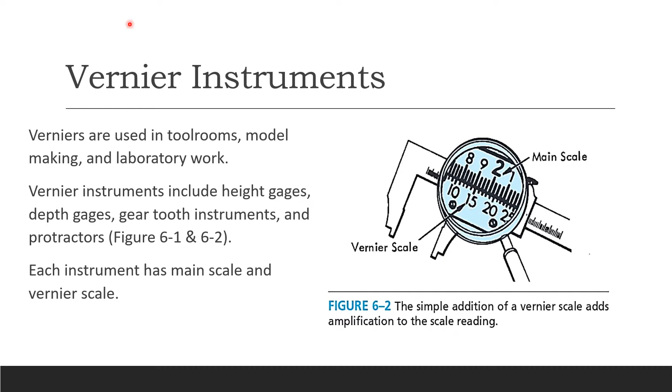With vernier, you can read to 3 decimals. First, you're going to round off the reading, so select your nearest inch. Then select 0.1, that's your first decimal. Then we're going to read the second, about half, so right here. Then we're going to read the third decimal. So in this case it's 2.115.

It's pretty difficult to see, so take your time and be patient to be able to see these graduations, or discrimination.

When you look here, this is your main scale, and this one is your vernier scale. You're going to go from 0 all the way to 25. In this case, you read from left all the way to right. For this one, it's a little bit different because this direction goes from the right all the way to left. So just make sure where your zeros are on your vernier scale.

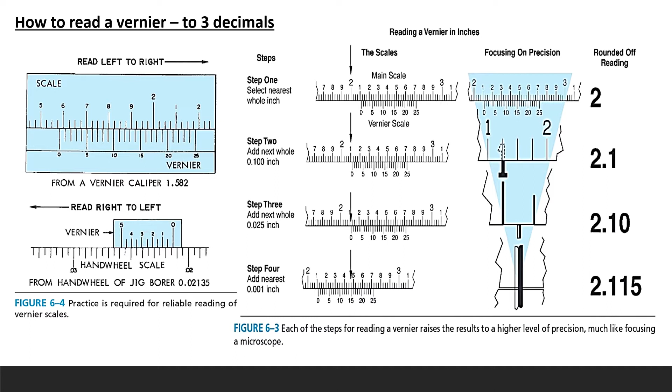You have two scales, the big one and the little one. For vernier instruments, nearly all of them are available with metric scales, but in America we use decimal inch as well. Not all of them, just nearly all of them are in metric scales.

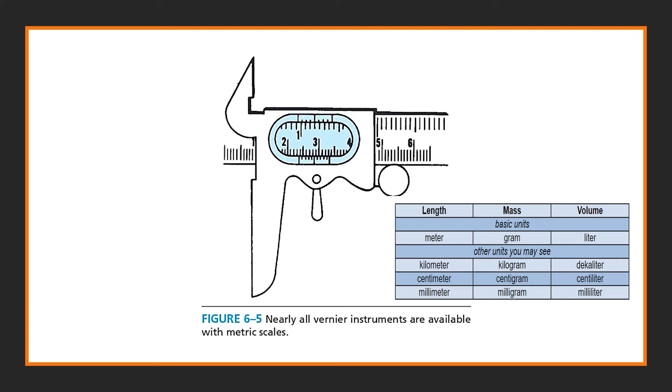For vernier, if you have like 50 divisions, then it's easier to use than a 25 division vernier. And here are the advantages and disadvantages of vernier scales.

They're pretty easy, you can read through it. Amplification is achieved because of your design, and design is so important for vernier, because if you didn't build your instrument in the right way, it's not going to give you a reliable measurement. You don't need interpolation, meaning you don't have to calculate by hand, all you have to do is just read it. And there's no theoretical limit to the scale range at all.

And the zero setting adjustment is pretty easy. All you have to do is close your vernier and then set it at 0 to calibrate.

Disadvantages: accuracy lies in the instrument on which verniers are used, the way you use it. And the reliability of reading depends more on the observer than most instruments. So again, the way you use it, the way you read it, the discrimination is limited, and that is also a disadvantage. And there's no way to adjust for any errors other than 0 settings.

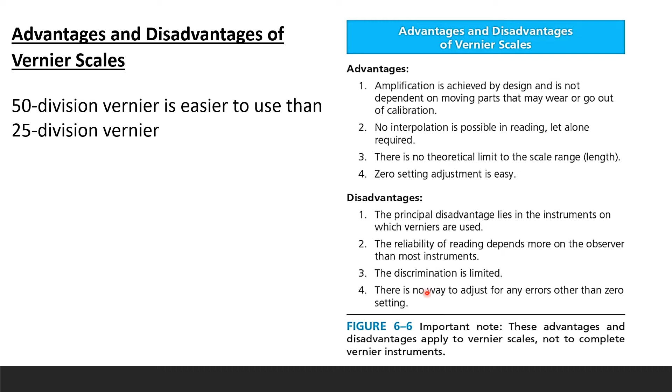So vernier is kind of like a trim that you put onto an instrument. If you put the vernier on a caliper, you get the vernier caliper, and that's a slide caliper with trimming. When you look at it here, this is your beam, you gotta read it very carefully. These are just showing you the functional features, and that's your metrological features.

When you take a look at it, you're going to see the vernier scale plate, and inside of that is your vernier scale. Here are your jaws, you can do outside and inside measurement, because when you look at the shape, you'll see on each jaw a little edge, at 90 degrees.

So that's where you put it to do your inside measurement. You can line these edges onto the rim of whatever you're measuring. This is your fixed jaw, and that one is adjustable because you can roll it in and out.

On this side is your metrological features. Here, your reference point is your fixed jaw, therefore it is your reference point. This is your measure point because you can adjust it in and out. This one is your axis of instrument, where you use it to align your part. Alignment is so important for vernier.

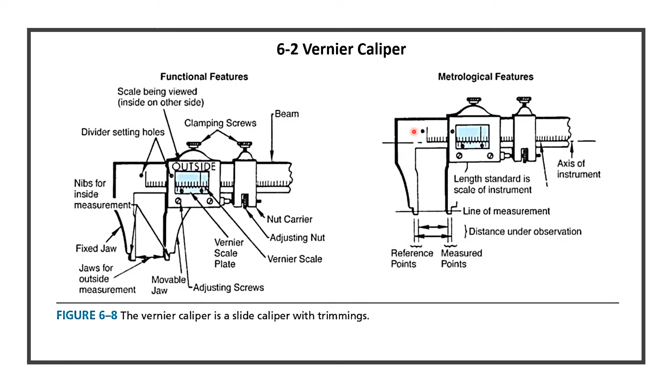So if you remember, there are two measurement methods: interchange and displacement. For verniers, the method is displacement. Every measurement you're doing has three elements: one is your part, the other is your measuring device, and then your standard.

For vernier, step one, you're going to observe one end, so that this is closed position. Therefore we're setting the 0.

Vernier itself is your instrument and also the standard. The part we're going to put in, so here that's your part. You're going to observe the second end of the part simultaneously with observation of the standard. So here's how you measure the part using a vernier caliper.

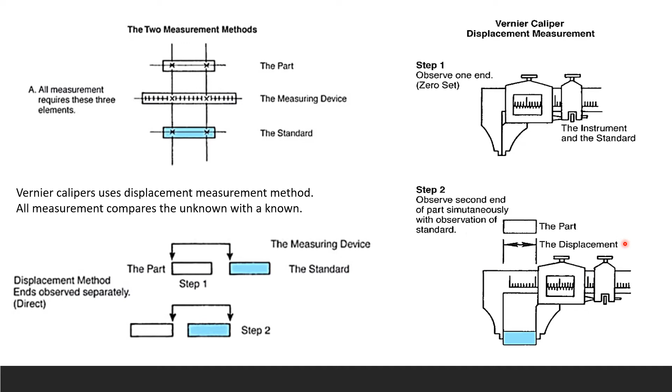Vernier calipers don't follow Abbe's law. Abbe's law tells you that you get maximum accuracy when your standard is in line with the axis of the part being measured. When the standard is in line with the axis of the part being measured, you get maximum accuracy, but this one doesn't follow it.

So when you look here, there's a position error right there, because this position X is not in line. Here this is your line of measurement, so we have position Y, and there's error in measurement when Y is not 0.

When Y is 0, Y is definitely 0, when X is 0 or H is 0, but this condition can never happen. Even if you go all the way to the end, to the fixed jaw, it looks closed, but that's not 0. So H can never become 0, therefore this condition cannot happen. X can never be 0, and neither can H.

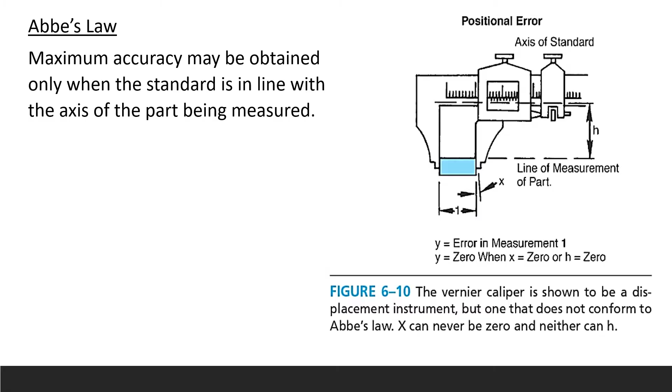So here are the steps for using the vernier caliper. I'm not going to read that for you, you can go ahead and read it yourself. It's all about calibration, cleaning, maintaining, and how to use it step by step.

We're already doing that. The only thing we didn't do is calibration and cleaning, because I just came into this school about 3 weeks ago, so I haven't actually looked into the instrument yet. But I think we definitely need some cleaning on our instruments.

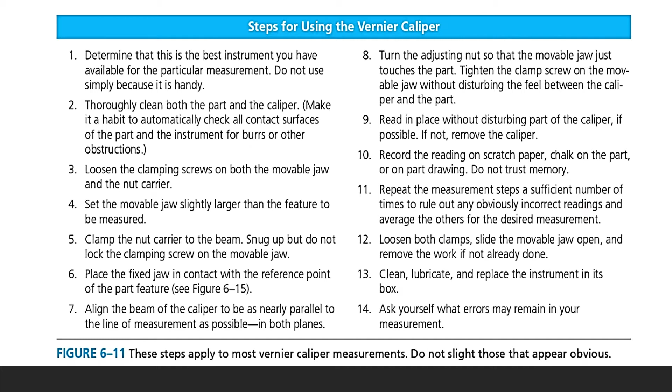So when you use your vernier caliper, you have to be so careful to check your alignment between the caliper and the part you're measuring. Otherwise, you won't get an accurate measurement at all, because geometry is vital to get a reliable measurement.

So here is your line of measurement, this is your reference point, and that is your measured point, and from here to here is your measured distance. And this is your plane of the caliper. Just make sure that you've got that alignment correctly.

So here are your 4 essential points. Line of measurement is the shortest distance separating the reference point and measured point. And if the part is rectangular, the line is perpendicular to the reference edges. This needs to be totally perpendicular to get a reliable measurement.

Second one is line of measurement must lie in plane of caliper, same thing, right here is your line of measurement, so we want them parallel to each other.

Then the line of measurement must be parallel to the beam of the caliper, the same thing. This is your beam of caliper. And fourth, deviations from the above will be included as error in the caliper reading. So if you do it wrong and get deviations, that's your error.

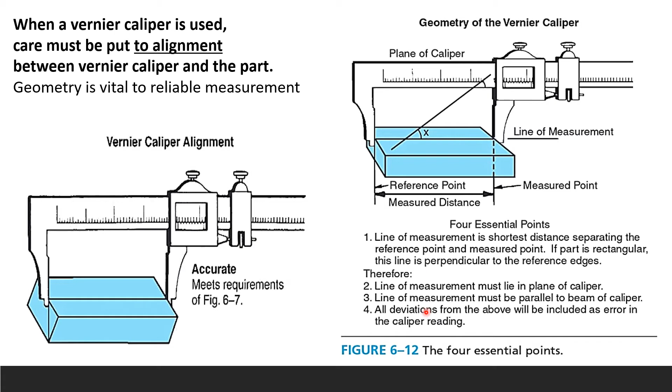So we start our lab and I ask you to measure a cylinder and a water bottle, and I see some people doing it from the side even though I told you to go ahead and measure it using the normal calipers. Anyway, if you use a vernier, it's better.

If you have a flat surface and we're trying to get that measurement for diameter, try to do it from top or bottom. So here you're seeing the caliper from the top, you can only see the top of its head right there, so that's your beam top right there.

So what you do is you put that vernier caliper onto your part, and then you're going to swing it around past the center, and then hold your instrument, your vernier caliper, just to the center to get your diameter.

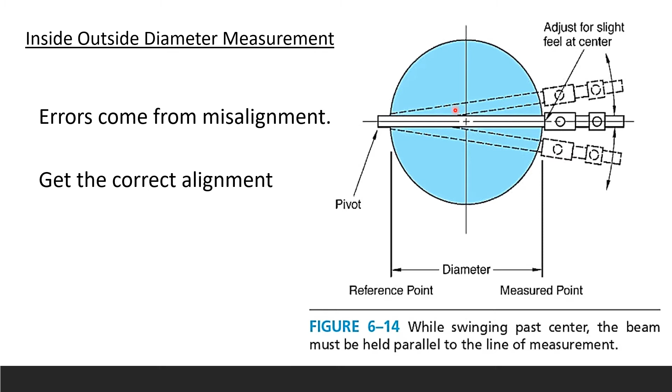So errors come from misalignment. If you don't do your alignment correctly, you will definitely get errors from your measurement. So make sure you get the correct alignment, even if you're measuring for a diameter, go all the way to the center by swinging around the circumference.

In the lab, I gave you the plastic material because if I gave you the metal material, you would dent it, and we don't want that. For plastic, you definitely need to be careful with your force, because sometimes over tightening can happen.

This is the correct way, but sometimes you can over tighten your instrument, so you're going to get curved out like this. Here you can see the edges are not aligned, not 90 degrees—it's totally angled out. So we can see C and D right there, and your A and B right here. So here is your curve, and then we're getting the distance for the difference.

Now from A to B is 10, and then from C to D, because of the over tightening, we're losing 0.016. Because this beam—look at that—over tightening causes the beam to bow out.

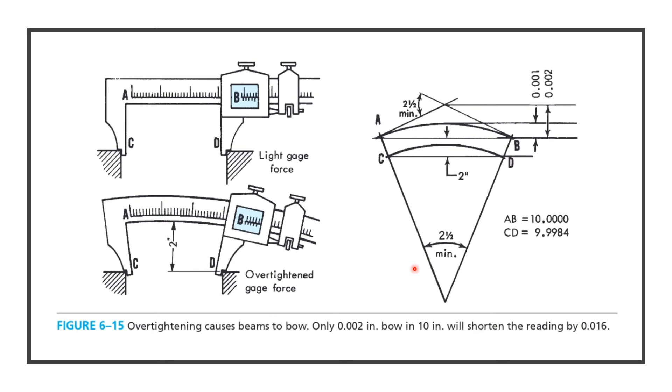So with the vernier, you can't rely on it if you are manipulating during your measurement. Manipulation during measurement is nothing but you're not getting correct alignment. Here when you look at it, this part is oversized and that part is undersized. So what we want is this position. So manipulation of the part and instrument is by far the greatest cause of errors with vernier calipers.

So if you want to keep your accuracy and avoid additional error, you've got to check for defects, and then you have to calibrate your instrument frequently.

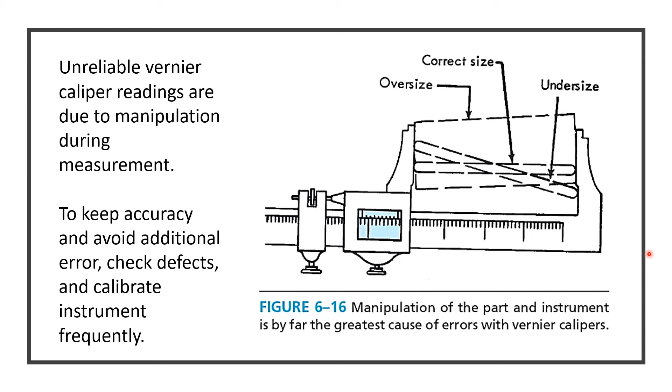The next thing you need to know is we have jaws, two of them, fixed and adjustable. So we have jaw error, which can cause plus and minus errors. Don't confuse that with the standard deviation—that's not your tolerance zone, that's just your errors. And that depends on where the part feature contacts the jaw. So again, you have to pay attention to your alignment because jaw error can cause plus or minus error.

Here you can see that's your correct size, and this is your undersize, and that is your oversize. So oversize is going a little bit off, undersize is like over tightening.

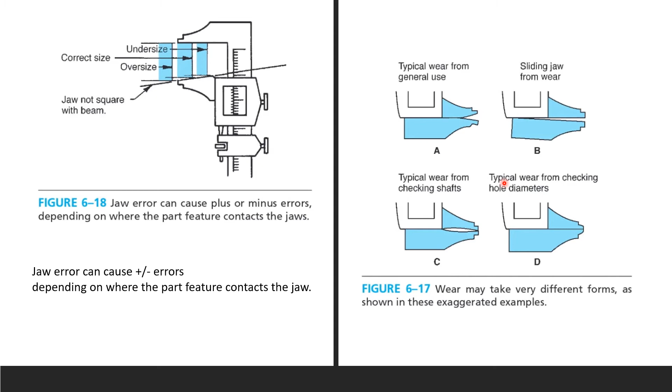And here you can see your typical wear from general use—see how this is not perfectly aligned and that's kind of open. And here you have a pocket in between the jaws, and we don't want any of that. Those are all wear, and because they may take very different forms, they're going to give you errors.

Since the design shape of the vernier is pretty good, you can get high repeatability. This is not reliability—students usually make mistakes here on the test. They always read this as repeat, okay, that's not reliability, that's repeatability. And if I put reliability, they always choose the wrong thing, so just pay attention here.

All measurements could be incorrect as well as correct, and that depends on how you measure it. So you've got to do repeatability tests regularly by using standards of known value, like your gauge blocks, like we're doing in the lab, and your master cylinder—we don't have this one here.

So repeatability, accuracy, and precision. Repeatability is of one measurement on one part with the same instrument and observer. Repeatability does not measure the accuracy of the instrument, nor does it measure the precision. What it does measure is the combined precision of the observer and the instrument for one portion of the entire range. It can also measure the accuracy for the combined observer and instrument for one portion of the entire range, if the true value of the test part is known.

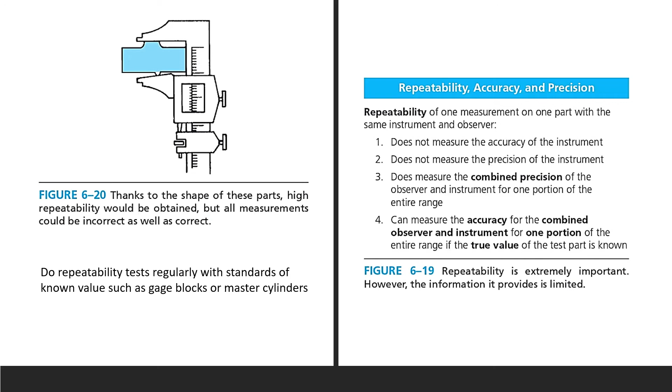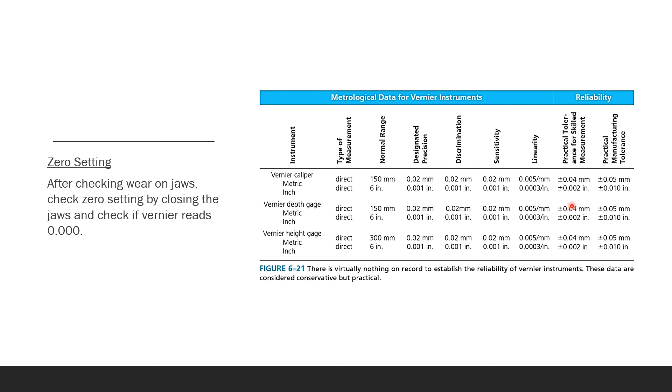Discrimination is your graduation, sensitivity, linearity, and your reliability. Then we're gonna go into dial calipers. It's the one that we have. Both of them we've got it in the lab. And here, this one is your electronic or digital, and this one is your regular dial. Some of them come with a charger. Some of them go with a battery, like we have.

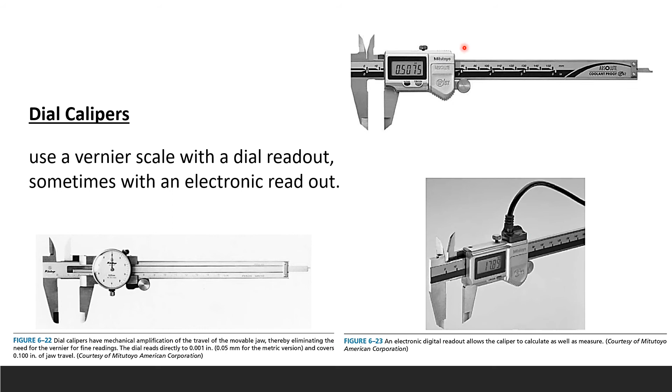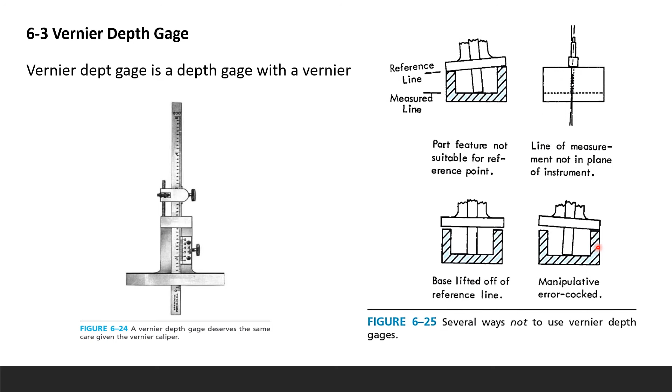And when you look at it here, there are several ways not to use your vernier depth gauge because it's not going to give you reliable data. So here, the reference line is totally messed up. It's not aligned with your measure line. And here, when you look at it, the line of measurement is not in plane with your instrument. And here, when you look at it, your base is lifted off, okay, off of the reference line. And here is a manipulative error, totally off, okay. That's pretty bad.

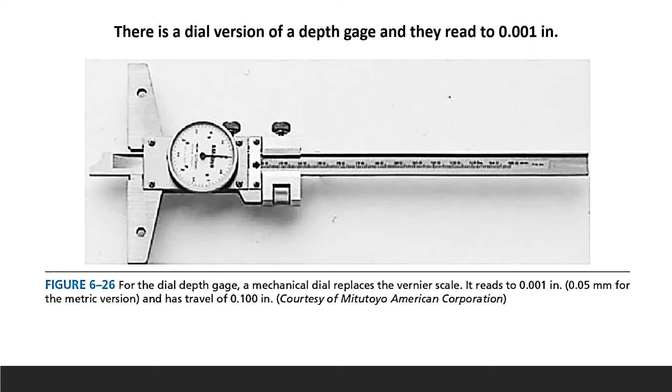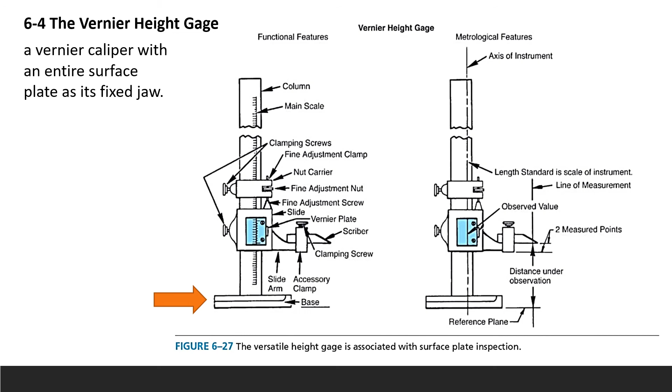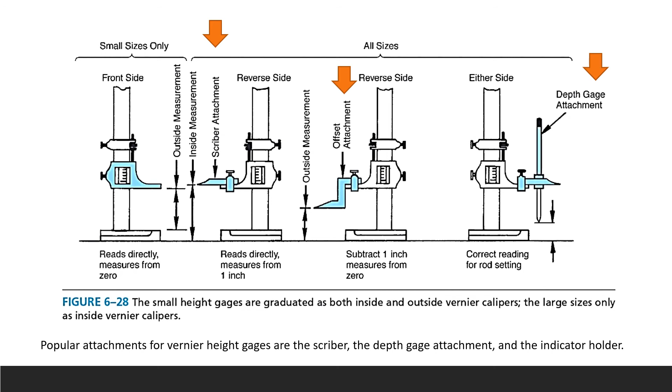We can also do the outside and inside measurement, so it's pretty good. For offset, you're doing here outside measurement. So the scribe attachment, we commonly use that for the scriber for layout, and for offset scriber we use it. It can be used all the way down to the surface plate, right?

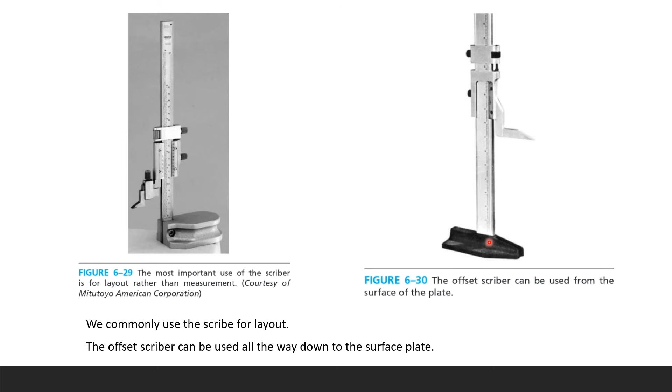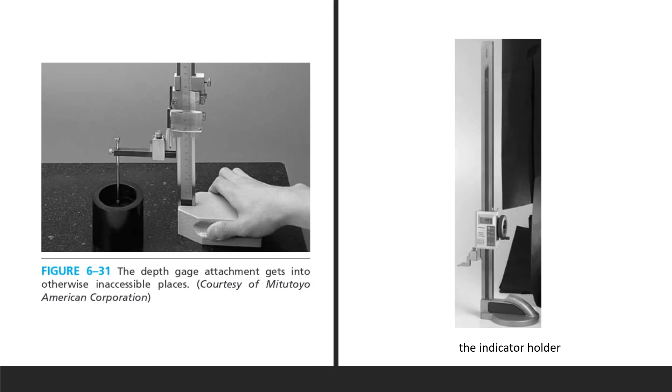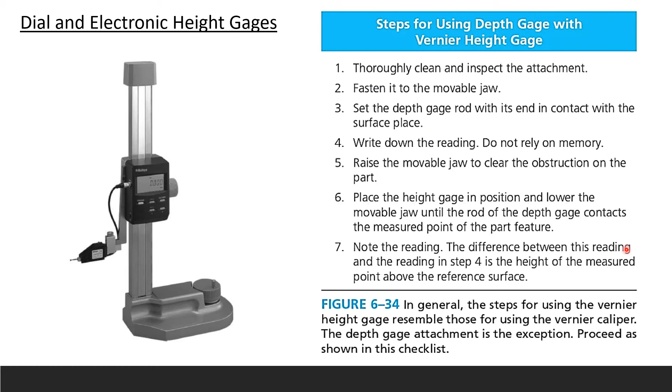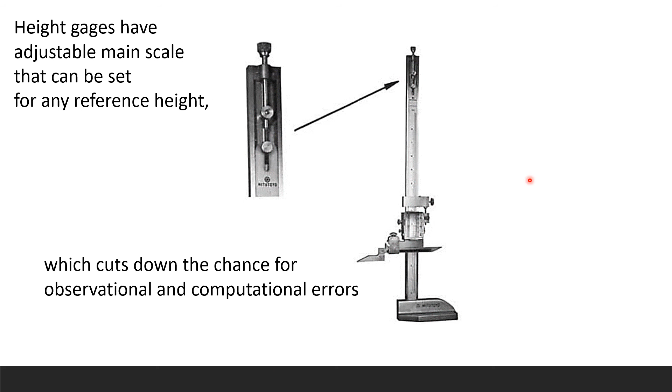I think that would be the hardest part for this chapter. Try to recognize the instrument.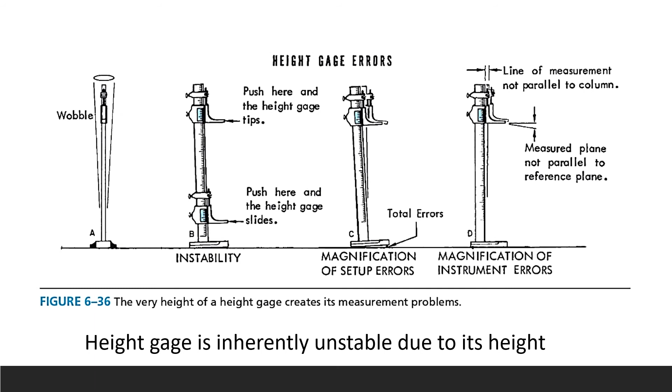So this one just shows a height gauge with an enlarged base and massive column here, and it usually creates measurement problems. It just looks really cool with it.

It's not pretty good. So setup errors include dirt, surface plate error, burr on the height gauge base, and so forth, wear and abuse can disturb the squareness of the column to the base and of the movable jaws.

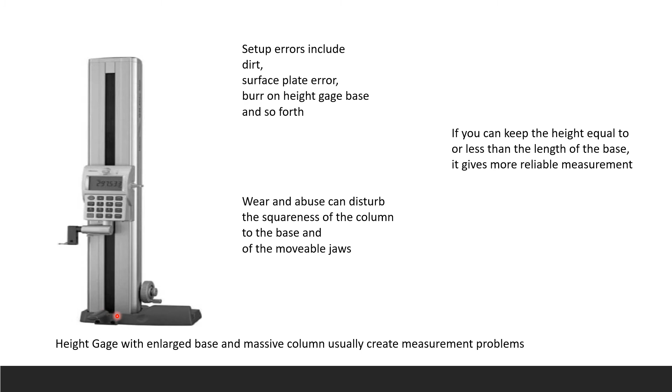So if you can keep the height equal to or less than the length of your base, it's going to give you more reliable measurement. This is just trying to show you the ratio of base to height.

Okay, so here's your measure line, that's your reference line or plane. And here, this is your line of measurement. So when you take a look at this part, that's reliable because your base length is greater than the measurement. Okay, so you're basically comparing your base length with your measurement, which is your height.

That's kind of satisfactory because your base length equals the measurement again. Your measurement is right there, and this is your base length. So here, that's what we're comparing. This is unreliable because your base length is shorter than your measurement.

So in mathematics, we're going to say AB is less than XY. That's your height and that's your base. The best and most reliable measurement is when these two are equal, or the base is greater than your height.

The same thing right here when you choose a support surface. Consider its condition as well as the ratio of base to height. Again, the base has got to be equal to or greater than the height. Then you're going to get the most reliable measurement.

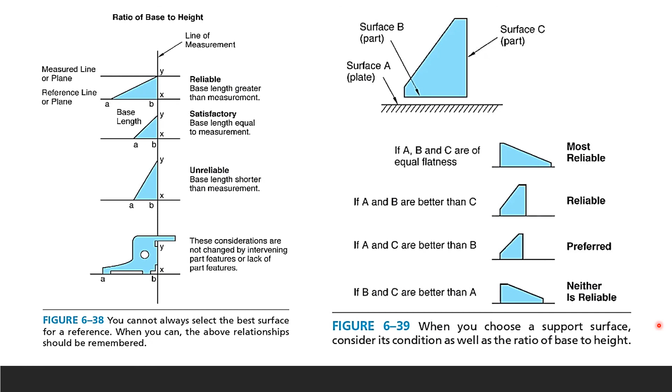Then here is a table of suggestions for reliable height gauge measurement, and you can follow them carefully. But in our lab, we're not doing this because we have only one height gauge and it's kind of broken. I checked it yesterday and it was funny.

Anyway, so you also need to be aware of the quality of your surface, because if the reference surface is unknown or poor, there's less chance to get a reliable measurement. Vernier protractors, we're going to learn about them in chapter 12, not here, not in this chapter.

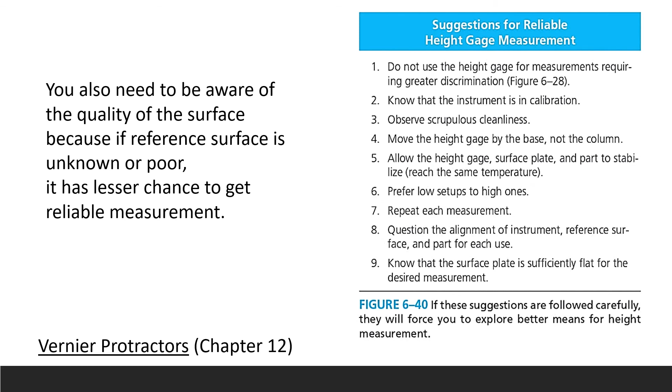Okay, so the last one is your gear tooth vernier caliper, and you only have to know what it looks like. So if I give you this and this, then you should be able to identify that as your gear tooth vernier caliper. It is two vernier instruments combined.

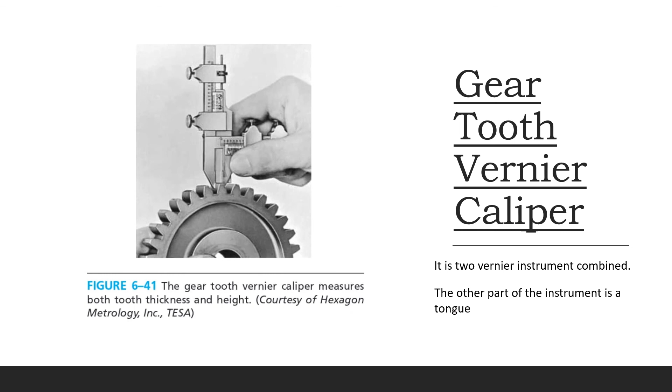One part is the vernier caliper and the other part is the tongue. The vernier caliper part is to measure the tooth thickness at the pitch line, and the tongue part travels between the jaws to measure the distance from the top of the tooth to the pitch line of the tooth. But you only have to know it, we're not going to ask about any of that.

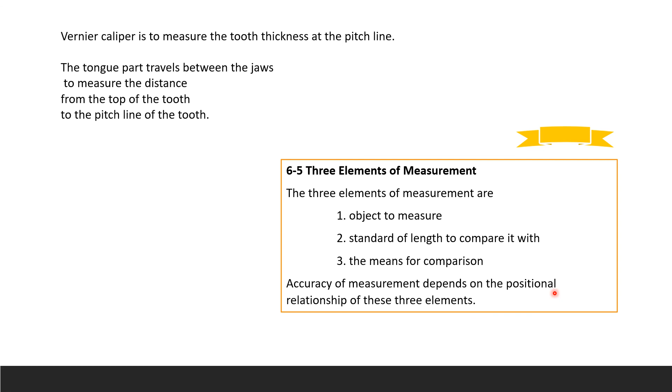So finally, don't forget the 3 elements of measurement: the object to measure, the standard of length to compare with, and the means for comparison. So the accuracy of measurement totally depends on the positional relationship of these 3 elements. Don't forget positional, because alignment matters when we're measuring. All right, that's it for this chapter 6.